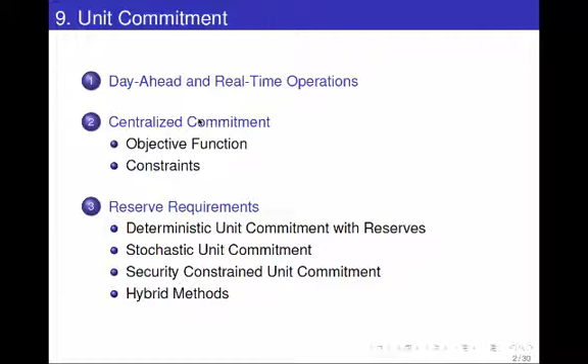So to motivate the model we're going to look at, I'll talk a bit first about how control and operations are split into different parts. There's the day-ahead part and the real-time part, and they do slightly different things. The unit commitment problem is part of the day-ahead planning that takes place. Then I'm going to show you the model and some variants that have to do with uncertainty.

Day-ahead operations are performed somewhere between 24 and 36 hours before the beginning of the next day. Why would you think it's even necessary to do planning for the coming day? You could always make decisions in real time. So what is it about any system that makes you want to optimize in advance?

If you have renewable energy? I could see it the moment it's being produced and then balance. If you have a storage system, you have to plan for future consumption. Right, so storage is a good example. Anything in your model that creates time dependencies creates the need for planning, for looking ahead. Storage is a good example.

Can you think of something else that has to do with thermal generators? I mentioned an example last week. There are nuclear units that need a week's notice to generate the same level of power at any time.

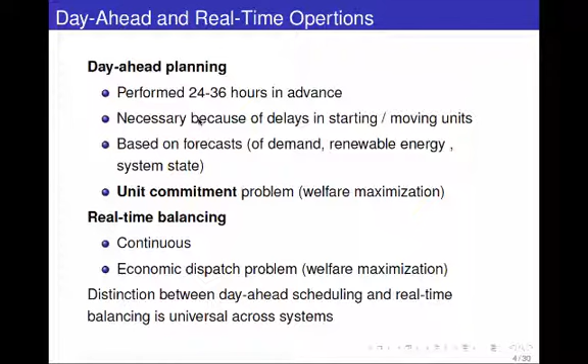Until you reach real time, where you're just running behind the wind forecast errors and the demand forecast errors. Many power system operators have decided to break down operations this way: we have day-ahead planning, and you could then be replanning over and over until reaching real time. Some systems do that, but there's this standard separation of day-ahead unit commitment and the market around it, and then real-time balancing and a market around it. So these are the two layers of the onion, if you will.

Now, the day-ahead problem can be very large and very hard to solve. This is an example of the largest model you will find out there: the Pennsylvania, Jersey, Maryland system, covering a good piece of the northeast United States. You have 1,200 generators that submit these offers.

These offers look a lot like what you submitted for your homework: block bids of quantity and price. In addition, they also submit startup bids and no-load cost. These are the pieces of information that they send to the system operator.

There's 10,000 wholesale customers bidding for demand, and then there are traders from banks and elsewhere who make forecasts about tomorrow's prices and take positions with bids themselves.

But this information also enters the optimization problem, and the system is transmission constrained, with the usual PTDF representation we've seen, with almost 9,000 buses. The system operator also has to worry about failures. The bottom line is that this is an enormous optimization problem, and it's a hard one to solve because there is one feature about this problem that we haven't encountered so far in the course.

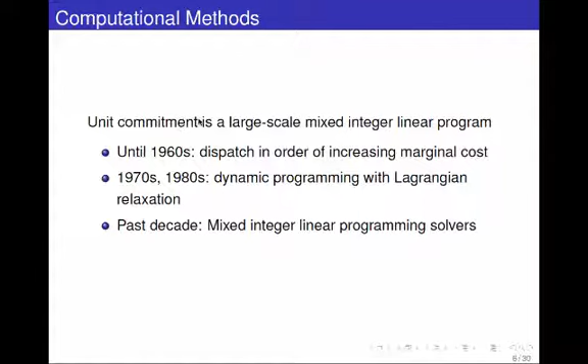And over the last few years, there have been amazing achievements with branch and bound solvers. The size of mixed integer linear programs we can solve these days is enormous—much, much larger than what we used to do a few years ago. These branch and bound solvers have made their way into the control room, so now we're using branch and bound for unit commitment. Let's look at this, and you'll be asked in the next homework to actually formulate such a problem and solve it in a small system. So let's see what the model looks like.

Now, the objective function is, again, maximizing welfare. So consumer benefit minus generator cost. Why do you think these two terms look different, though? What property does this function have? I'm expressing benefit here in terms of hourly benefit, whereas here I'm not doing that. Why do you think that's the case?

Because the generator can change from an hour to another its production. It can change it. The more constraints that you have, you can shut it down, but you can't activate it the way you want. Right, so there are constraints that limit what you can do, and it depends on the past. Those could be in here, though.

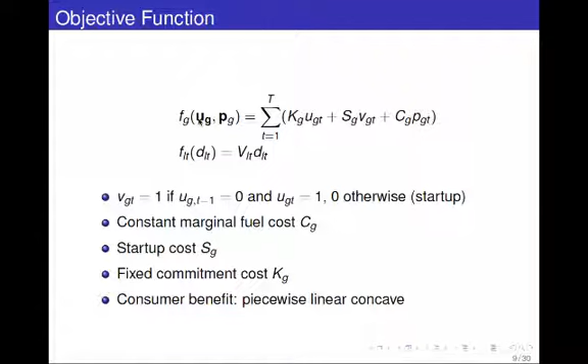But it will be... The program, no, your maximization program is then going to set UG to 0 because it will bring cost in the optimization function, and it will set the production to high amounts, and that's not in contradiction with your model. You see what it's saying? Suppose you ignore it, he's saying that the optimal solution will always have u equal to 0. The reason is the objective function. You're paying for it, you should be paying for it. So what Benoit is saying is if you don't have this here, you can have 0, you can produce up to that level, but you get it for free, which is not what we want.

So that's a condition for UGT. The bottom line is you need something like this to show up in your math program, otherwise you don't capture the effect. Okay, so how about here? What's going on here? This is one of the constraints that creates intertemporal dependencies now. So what do you understand with this constraint?

Ramp rate, is this the time required to switch from off to on? No. If you're on, how fast you can go up. Oh, megawatts per minute that you can move up or down. There's both of these constraints.

That's why it's important to do day-ahead planning, because if my forecast is that I will be over here, but my unit can only go up at this rate, I won't be feasible. I need to make sure that by this hour, I'm at least over here. This is the time dependency that creates these complications that make day-ahead planning necessary. This is one example of the time dependency. Is this clear? Yeah? Okay.

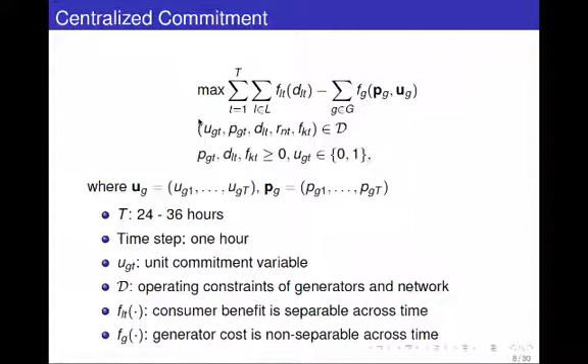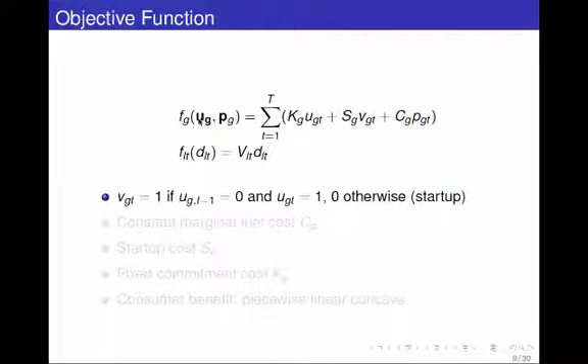So now I screwed up, I think. You won't have more than one VGT that will be 1, because if it's on, it's on for a certain period, so it's not on and off again. So there is only one VG that can be 1. I fully agree with you.

Also, what I wanted us to notice here is that, well, I kind of screwed this up. So I should have actually written here from 2 to 4, UG4 will be, we will also have this constraint, and here, among these guys, is also VG3 equal to 1. So, in that case, UG4 will also be pushed to 1. And finally, UG3 will be greater than or equal to sum from 1 to 3 of VG tau.

And because VG3 will be 1, it will also show up in this left-hand side, and it will push UG3 to 1. So you get exactly what you wanted to get. If you decide VG3 is 1, it will push the 3rd hour, 4th hour, and 5th hour commitment to 1. And only those, okay?

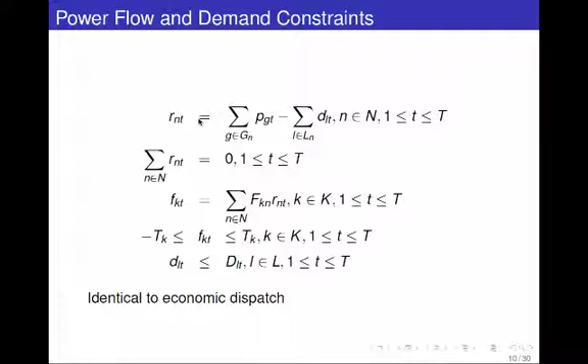And like you said, it will also force the other V's to be 0, which is completely fine. I mean, if we're starting up the unit at period 3, we only wanted to start at period 3. So what I've shown you, basically, is that this inequality gives us the implication we wanted.

Now, you also want to make sure that it doesn't cut off other feasible solutions. This is an inequality that I'm throwing to my math program. So, if you think in terms of integer programming, I'm going to make this a bit abstract now.

If you think in terms of the lattice of feasible points, I'm just going to draw the lattice for 2 variables here to try and illustrate my point. So there is, this might be a good example in fact.

Okay, here, let's think of what combinations of these 2 variables are feasible for our problem. And if V is 1, I know U has to be 1. So this point is feasible, because if I start up in hour 1, the commitment for hour 1 has to be 1. Right? So this is a feasible point. Would this be a feasible point? Here, for our problem? No. Cannot be.

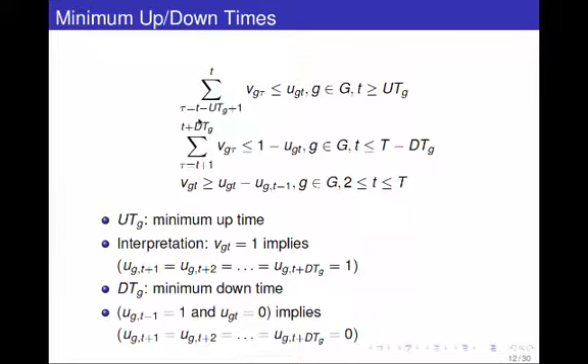These constraints now make day-ahead planning really important because some units need 8 hours, 10 hours, 16 hours of downtime, for example. So if I shut it down today, Thursday, I know that until the beginning of Friday, the unit needs to be off. So that's a very long constraint, so that's why I need to be planning down the line, looking deeper in time. So these are another example of constraints that create temporal dependencies.

Why is it one day ahead? And why do you plan one day and not two days? Or it runs from 1 to 3 days typically. It's not commonly necessary to go beyond 3 days because any constraint that I decided about today evaporates 3 days down the line.

If I have a minimum uptime of 8 hours, how deep in time will my decision now affect my life? Can it affect my life 1 week down the line? It's an 8-hour constraint... 16 hours, right. If it was on, you need 8 hours sitting there, 8 hours sitting there, so it's an order of magnitude of the time coupling that is created.

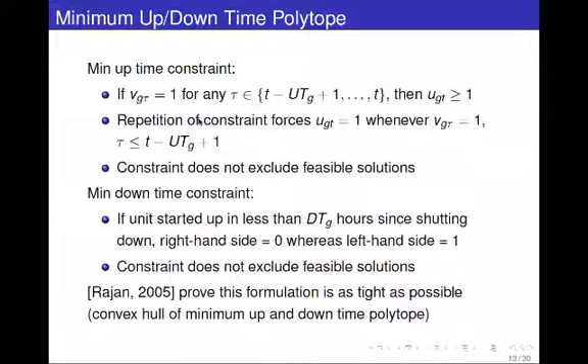So that's why when you're doing day-ahead unit commitment, you don't solve a 1-year problem, because 365 days from now, it doesn't really matter what you decided a year ahead. So that's why the horizon is typically 24 to 36 hours. Of course, the deeper the horizon, the better decisions you make because you're accounting for what you know, but it's also harder to predict, and also some things just don't matter 4 days from now. That's the idea.

Okay, so this is a bunch of details you can add to the model.

I've been working on some of these, and Pierre-Antoine Absil has been working on some of these too. We're both inspired by problems that GDF Suez has. You can have startup costs where the cost depends on how many hours have gone by since you last shut down your unit. That's tricky to model as a linear program, but there are ways to do it as a mixed integer linear program. There are papers out there, and we're doing some of these implementations ourselves for GDF Suez.

Then you can have a nonlinear heat rate curve. Again, you can get away with a linear model. The ramp rates can depend on how much you're producing, and there are sometimes these predefined sequences.

So if I decide to start up now, then for hour t plus 1 I have to produce at this level, for hour t plus 2 I have to produce at this level, and for hour t plus 3 I enter the generator minimum, and then I'm playing in this phase here. But up until t plus 3 hours I follow the predefined startup sequence.

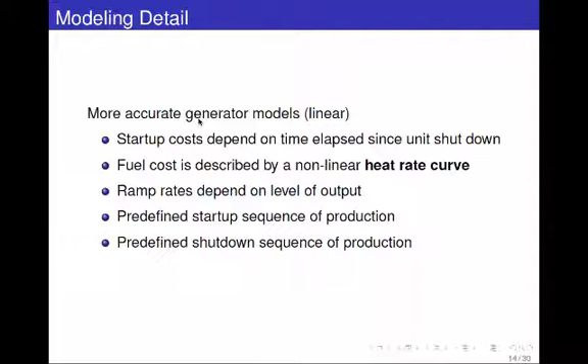We did an interesting project for Colombia where we were trying to predict market prices based on their hydrothermal fleet, and you really need to account for these details to understand why the prices are what they are. Once this generator enters this dispatchable region, it starts influencing the market price, but before it enters it, it can't touch the price. So accounting for these constraints really matters for the project. There's a lot of applied stuff you can do with these models. It's a really interesting area of work, I think.

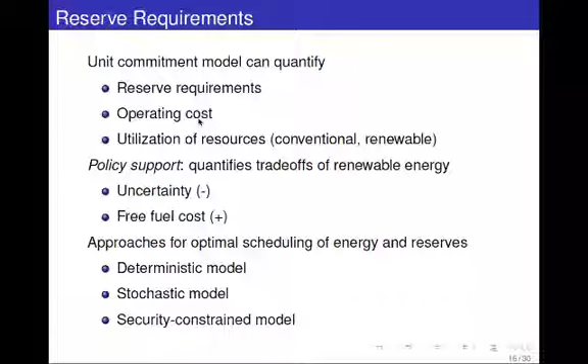There are three different philosophies I'm going to show you today for accounting for uncertainty in these models. The first is a deterministic model for reserves, where we tell the model how many reserves we want, and the model says okay, if this is the amount of reserves you want for each hour, this is how you should commit your units. So we saw the unit commitment problem, and now we're going to also add reserve requirements to the model.

To do that, we're going to define two variables: one is spinning reserve, which can be offered by units that are online, and non-spinning reserve, like we saw in the last lecture, which can be offered by units that are offline. The twist we add to the model is we tell it, okay, I want for each hour of the day a minimum level of total reserve. And if you want to think of this in terms of the picture, I drew this also last week and added it to the notes.

Maybe it's not like that this way. If you want to think in terms of a picture over the day, if this is your P max and your P min, and this is how much you've decided to produce for that hour, the amount of reserves that is available is this. The amount of spinning reserve that is available is this space here.

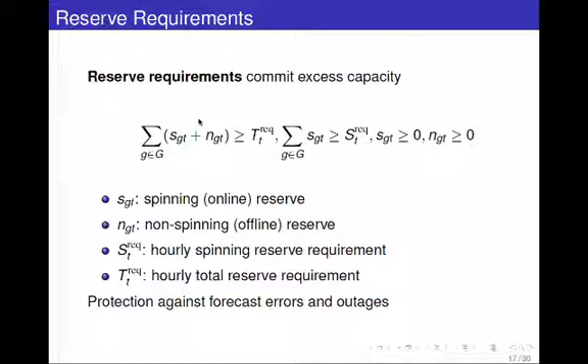The way to model this is for this space here, you add the spinning reserve decision variable. It's a non-negative variable, and you say that the sum over all generators of the spinning reserve they can offer, so this space I need to let free, has to be above the spinning reserve requirement level, and the same for total requirement. Okay, and here's how we modify the constraints. So, how do you understand this constraint here? Does it make sense to you?

What's the difference between spinning and non-spinning? It's S and N. Spinning and non-spinning.

So what is this constraint saying? It's the largest amount of production you can have. It makes sense that if you can only produce 100 megawatts, you can't promise to produce more than 100. But also, if you want to offer spin and non-spin, you can't go above your P max. So your emergency production plus your promised production of P can't go above your P max. That's the idea here. But what makes the two different, spin and non-spin, in these constraints?

Spin comes from units that are already on, so this constraint here makes them really different. If you don't turn your unit on, so this is 0, then you're stuck with a spin of 0 and a production of 0, of course. But you can still offer non-spin, even if you're off.

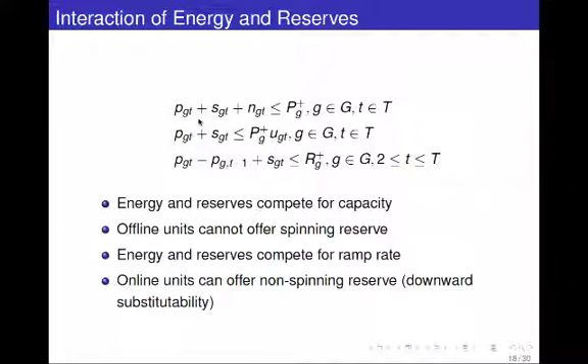And the first, I think the second exercise in your homework, oh no, I didn't add this. Oh, okay. Yeah, it's not in your homework. This is not in your homework.

Okay, and now we also have these import constraints that are another way to protect the system against outages. And the best way to describe this is in terms of a drawing.

So this is a typical situation. For example, in San Diego, it was a classic import constraint. San Diego is a large city in California. The thing there is that they have a local load. They have a bunch of lines that bring electricity into San Diego. So San Diego here is the B1 node. They have some local generation, and the rest of the power comes from outside. These arrows don't indicate direction of flow of power, they just indicate the reference direction in my graph that defines my electric power system.

So if I'm writing the model in AMPL, this is just saying that the from bus of line K, so I define a bunch of lines as a set in AMPL, and the parameter from bus that indicates line K1, what is the from node and the to node. That's a way for defining a directed graph in AMPL. So the from bus of line K1 is B3, and the to bus is B1. It doesn't necessarily indicate the direction of the power flow.

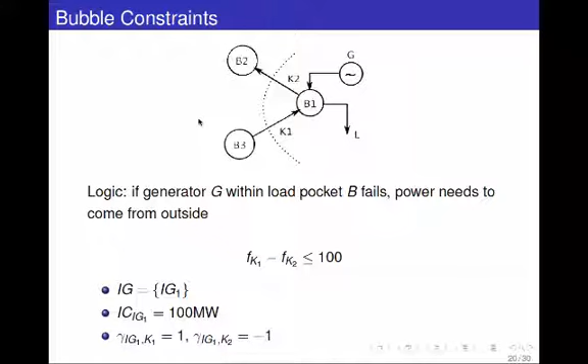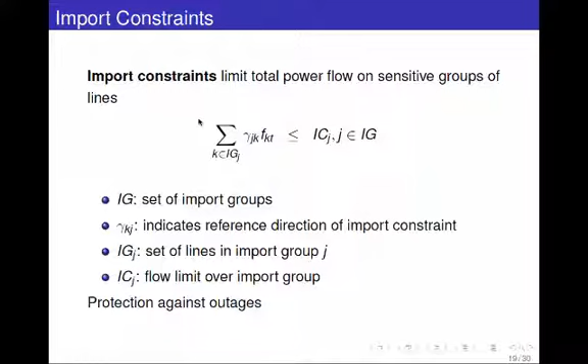So to define this we use import constraints. We define an import group which consists of these two lines, and the import constraint is 100 megawatts. We also define the reference directions, which are the coefficients here, 1 and -1. We impose this import constraint: the total amount of power flowing over these sensitive lines can't go above the limit. That's another way of protecting the system against bad things.

Okay, this should be in an earlier slide. This is initial conditions. I talked about them briefly. I'm going to jump over this in order not to interrupt the discussion. I'll fix that in the presentation.

One criticism about these models, and what I just showed you, the unit commitment problem plus these tricks, is the standard way for running systems currently. Recently, people have started criticizing this, because up to now these rules have worked well with low demand uncertainty, but in systems with enormous uncertainty, because of, for example, renewable energy, these rules are a bit too simple. You can apply them and commit reserves in a certain way, but you're not being smart enough about how you represent the uncertainty, and the resulting unit commitment schedules kind of suck.

So there's been a lot of work on improving the model we use for protecting the system against uncertainty. In the reserve requirement model, the total and spinning reserve requirements are numbers the operator just comes up with based on experience. They have a huge impact on the resulting unit commitment, but they're basically pulled out of your pocket based on experience. And for the import constraints, what import groups do you want? What lines should be in each import group, and what should be the flow limit? These are again based on heuristics.

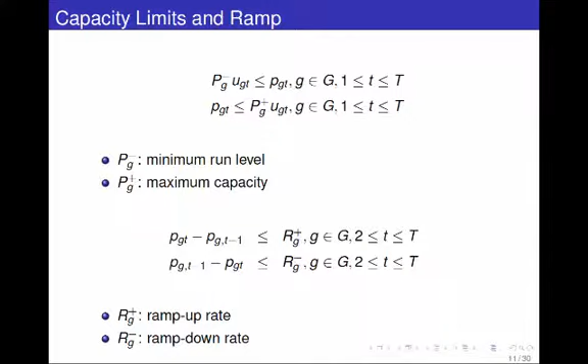So the new model would look something like this, for generator failures. If for that scenario I lose a unit, I create my data such that I push the Pmax and Pmin to 0. That forces the production to be 0. Now this stochastic unit commitment model has a bunch of structure basically. So that's one of the tricks you can do to model uncertainty: push the Pmax and Pmin to 0.

So what do we need to define to build up these scenarios? First, you need to define a set of scenarios in your code, and assign a certain probability to each of these scenarios. The objective of the model will be to optimize expected cost. So that was a trick for modeling generator failures.

And we can do a similar trick for modeling wind production. I'll split my group of generators between conventional units, which I need to do unit commitment for, and renewable units. For the renewable units, I'll have an hourly production that depends on the scenario. That's a way to represent wind production, for example. You have different profiles of wind production throughout the day, so for each hour of the day you have a time series.

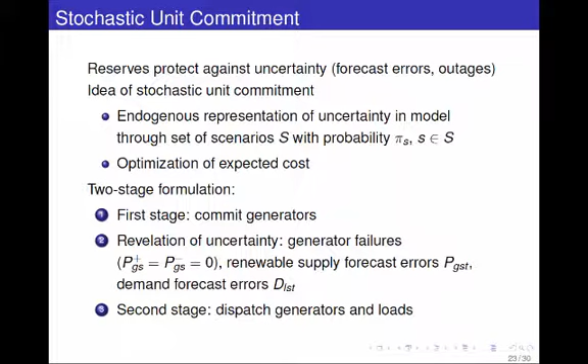That describes a possible evolution of wind production, and these are the PGST parameters for G that are renewable. This is what your objective function will look like. We're doing expected cost optimization, weighing each scenario by its probability, and then solving this problem.

So there are two types of decision variables in this problem: unit commitment decision variables and dispatch variables. These don't have an index over scenarios, and these do. How do you understand the fact that I'm not indexing these over scenario?

How do you interpret that? You don't know which scenario is going to happen before, and you have to take a decision on what you're going to do, whatever scenario is happening.

Exactly. So the sequence of events here is: I decide the day before, then I get to see wind and what units failed, and then these are very different decisions now. Now I've seen what happened and I can balance the rest of the system. That's the idea of the model.

All the while, I'm trying to optimize expected cost. But like Benoit said, these are basically first stage decisions. So this is basically a two-stage stochastic program that we're looking at.

So here's a couple of questions for you. What's the harm of committing a lot? Why don't I just commit all the generators in the day ahead? It's the safest thing I can do. Because then you have to use them, you have to pay. What specifically hurts you when you commit all of them?

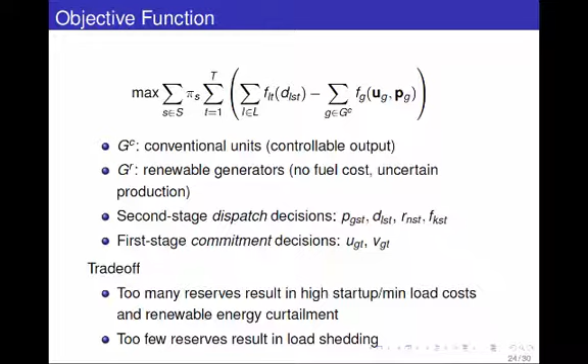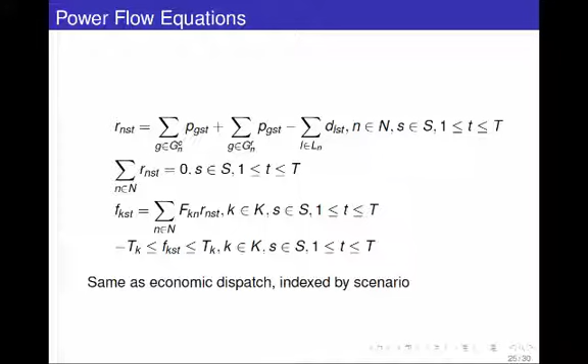And all these constraints, you saw them identically earlier. So these are the power flow equations. The only thing that has changed from the vanilla unit commitment model is that now we have scenarios. So these are second stage decisions. And so net injections, power, energy balance, the flow definition, and thermal limits.

Here's the trick I showed you for modeling the failure of conventional units. You push these two parameters to zero, and that forces the production for that generator to zero. And for the full day, if the P plus and the P minus are zero, the PGST is zero for all the T's. And for the renewable production, we have this thing here that says the maximum production I can get for that unit is limited by the scenario.

Now, for renewable units, I don't have unit commitment decisions. They're there, I don't have to start them on. It's not a decision I have to make one day in advance. If I get the power, I can use it. Also, there's no fuel cost for these units. You're only paying fuel cost for the conventional units.

And then ramp rates are like before. We don't have reserve requirements in this model, so the reserve decision variables, we throw them away. Basically, building scenarios is another way of doing the same thing as reserve requirements, just more detailed. And this is for demand forecast uncertainty.

Now, can you think of a couple of reasons why this model would not be used in practice? It looks like a very detailed model. So what can you identify as possible difficulties? Think in terms of from beginning to end, from building up the data to actually solving it.

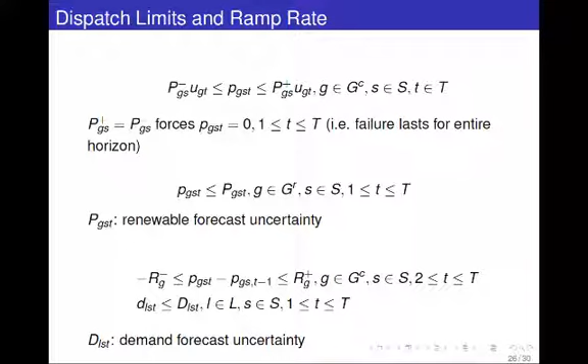Now, the philosophy in these models is that I want to minimize the cost of operations in case everything goes as expected. So the 0 here indexes a no contingency situation where everything goes fine. But in the constraints, I'm going to add scenarios where I only use one element at a time. So I will only have these constraints here, but only losing one element at a time. In a general stochastic program, I can be losing many of these in a single scenario. In a security constraint model, I'm optimizing cost assuming everything goes fine, but I want to make sure I commit in such a way that if I lose any one generator, I will satisfy all the demand.

This is a classic way for planning, practical planning in power systems. For example, in France, which relies on nuclear, or in California, it's the same thing. The amount of reserves we plan for is the largest unit in the network, which is a large nuclear unit. If we lose that nuclear unit, we are screwed, so we want to make sure that the reserves we have online can make up for that on time. So usually this is very consistent with what operators do in practice.

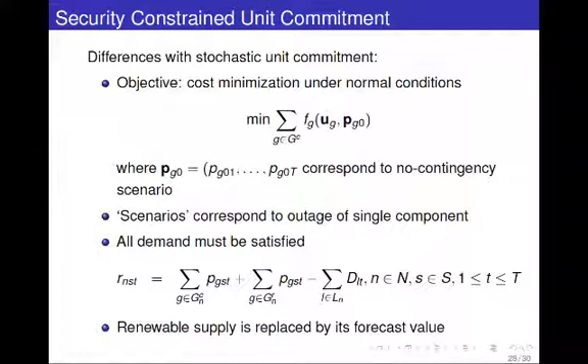But it's more conservative, again, compared to a stochastic unit commitment, and if you want to solve it in its full complexity, it can be quite large. Any questions about unit commitment? You'll implement a couple of these on a small model, and for the project, I'm thinking of a project on stochastic unit commitment. So you'll get a first taste from the homework that's coming up next week. Does this look understandable?

I would like to place some emphasis on solving the actual problem. For those of you who have been taking - well, that would actually only be you - 2491, we did Lagrange relaxation, which is the approach for solving the stochastic unit commitment model. So next lecture, I'm going to talk about subgradient methods in Lagrange relaxation.

Okay, so the last thing I want to talk about, as far as optimal power flow is concerned - if you remember in locational marginal pricing, we have a different price for each different bus. And I showed you this color map a few weeks ago of the PJM market, I think it was, where you had thousands of prices, basically. You had a whole color map which corresponded to a different price for electricity.

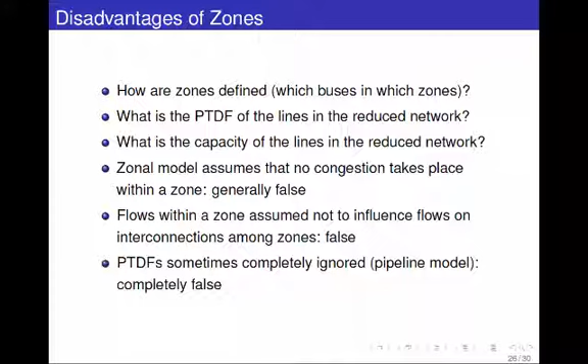Then an implicit assumption here, if this area is going to have a single price, it means that there is no congestion within the area, which in reality is not true. If you dispatch the system assuming a single price and no congestion in this area, the actual dispatch decision you make might actually be violating what's really going on within the area. You might really have congestion. So we'll see this specific topology in an example, and you'll see how zonal pricing can become problematic.

So here's the 6-node example that I've just drawn on the board, and you just have these 2 lines here that are congested. Line 16 has 200 megawatts of capacity, line 25 is 250, and node 6 is the hub.

I'm giving you the PTDFs for each of the lines with respect to 5 nodes, except for the hub node. And I'm also giving you data on the cost curves and the benefit curves of each bus, and the marginal cost curve.

So if at bus I have a generator, the BI is positive, and it has an increasing marginal cost curve. If bus I is a generator, the BI is positive, and I have an increasing marginal cost curve. If bus I is a load, BI is negative, and I have a decreasing marginal benefit curve.

Okay, how much -- suppose that I broadcast a price lambda I at bus I, and suppose that I have a generator located in that bus, how much would they want to produce for that price?

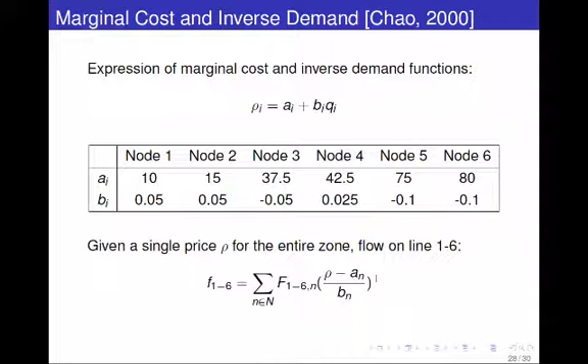Let's see. Right, it's a single—sorry, it's been a few weeks since I saw this slide presentation. Anyway, if you stare at the numbers, you can see that even if you try to activate this generator by jacking up the entire price, somebody pushes back and the limits are still violated.

So basically, you can't find the proper price that coordinates everybody to respect these two limits. So running this as a single price area cannot work for the specific thermal limit of line 1-6. So the philosophy has been: okay, let's do it anyway, see which line burns out, and if there's no violation of any thermal constraint, then we clear the market like that. It works for everybody and for the transmission network.

If there is a violation, then let's split the area into two different zones and make sure that the two guys at the ends of the line that would burn are in different zones. So then we have a different price in each of these two areas, and then we repeat. We resolve with this two-zone model and see what happens. Again, if there's another violation, we split further—that's been one idea of organizing zonal markets.